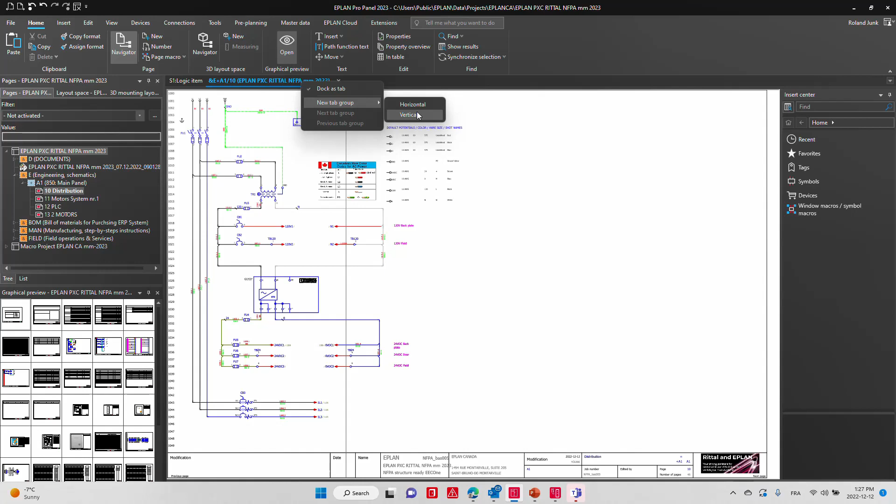You also know in EPLAN that we have the 3D. Let's put them side by side like this, right? So whatever object you have here, you actually have it here too. Now, what you do have also here is that you have the possibility to do the routing, which now evaluates the exact length of each of these wires.

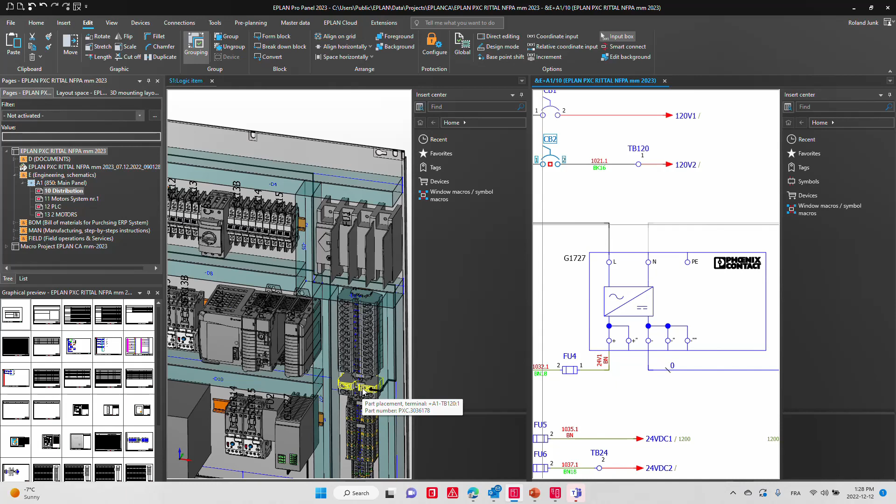So every wire that you see here, you can click on this wire and it actually has now a specific length. Why? Because I know from where exactly it goes to where it goes, right? It goes all the way across over here to this point here. And this is actually in the schematics, just this small wire here. It goes from CB2 to TB120, which is down there, that small terminal here. So we precisely identify where it goes and the length is calculated.

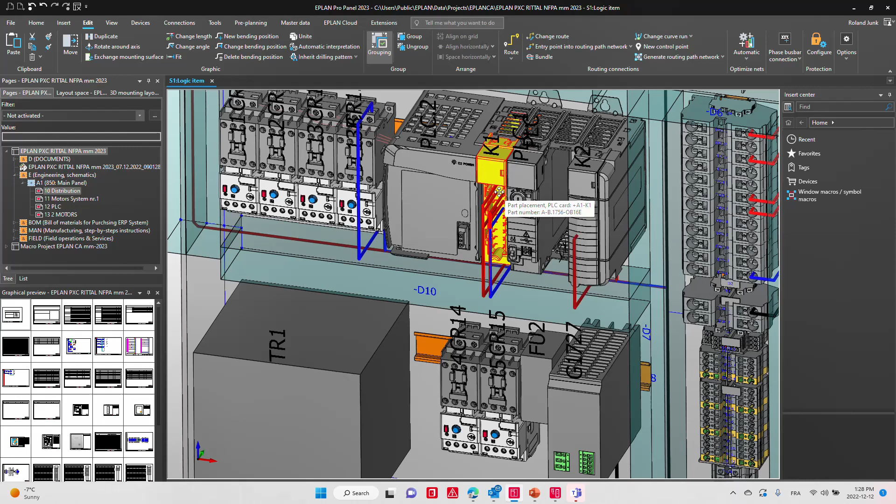Now, behind this, how does it actually work? Well, obviously, you know that most of these components, once they are placed, let's just hide this one here and you will see very quickly, this is a PLC, a typical PLC. And if I actually connect to a PLC, that PLC will hook up very precisely, as you can see here, on each of these connection points. So this is actually information that is saved at the component level once you get it from the data portal.

Now, in some cases, you have components like this one here that eventually is on the data portal, but for some reason, I did not yet download it. So the easy thing, of course, is if it is on the data portal, let's go and check it out first, and let's see what we can do at that point. So we go back to the data portal, we check it out. It most likely will be there.

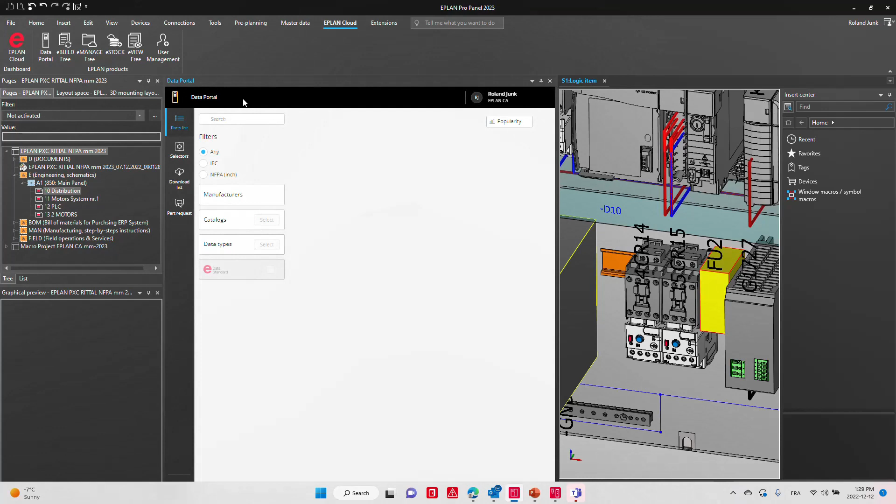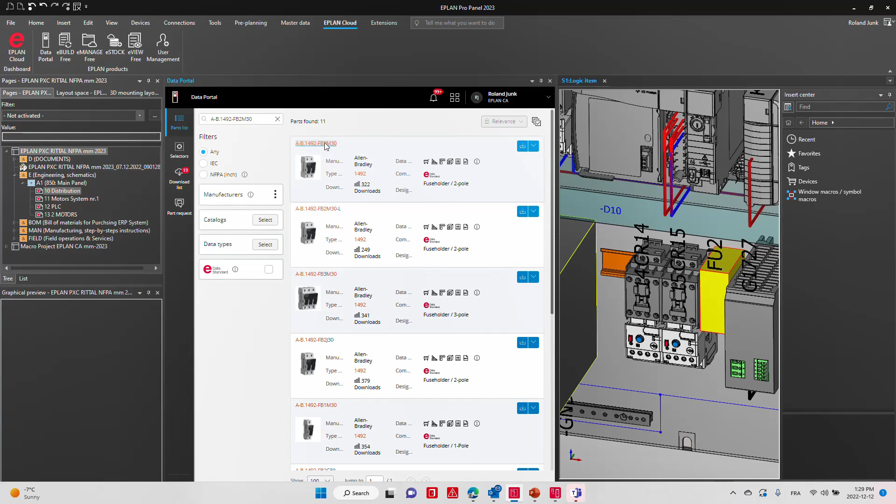I know this particular part here from Allen Bradley, I believe, is one of the companies among those 400 companies that really did put a lot of work in there. Phoenix Contact, Murr, Wieland, Festo, name it. I mean, you can see them here in the manufacturers, and these are the parts. And this is actually now the part exactly that we are looking at. And technically, if I look at this, I do have the 3D part here.

I may not have it in my system because I copied and pasted maybe the portion of the project. I may not have all these accessories, but if I import them, and I only have to import this once, now in a centralized way, I have all that parts information that, of course, will service me on the bill of material portion because I have now the exact description, the exact order number, but it also will help me when I place the component here because it's going to have not only the exact size, but the exact position depending on where exactly this component is actually set.

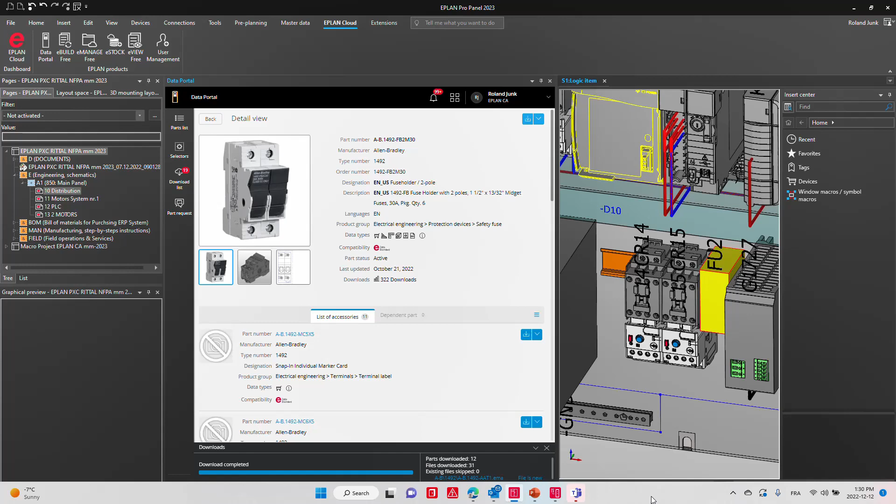So here, once it's downloaded and it's complete, let me just see, we should have access typically to an import button there. And it's going to import all that data into EPLAN. So of course, now that it is imported, the data is now available. So technically, as you know, these components here, you can simply run update parts placement. And because the part is now newly imported and the data is there, it will most likely replace it exactly with the right component.

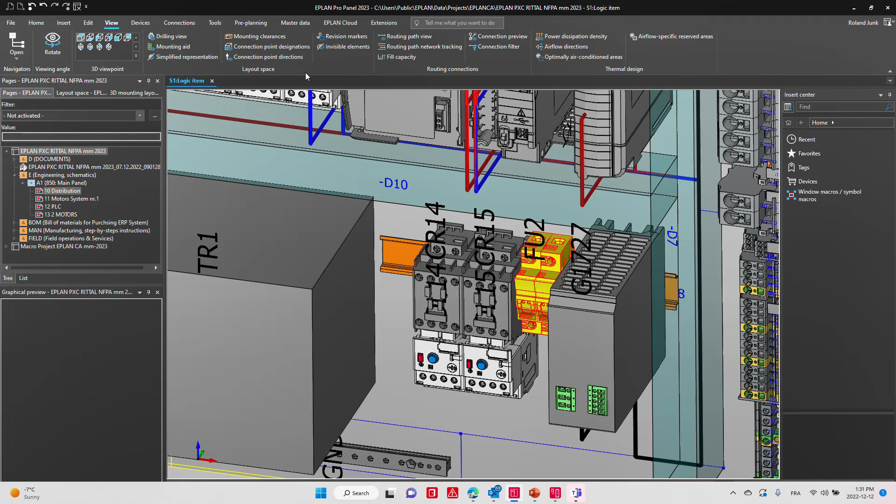And if I try now that I have this, right, and I check it out, it also has connection information to detail out where the connections go. You can actually see it here if you look at the connection point designations. They may actually have them. Now, that kind of information will actually service you when you do the routing later down the road.

Now, some people will say, yeah, well, the component that I have here, unfortunately, does not really have on the data portal the necessary data that I'm looking for, like the 3D. Okay, well, that's not a big thing because you can go on the websites very often of those components and you can find not only connection data, but you can very often find some download sections and you can find the step file, which I downloaded.

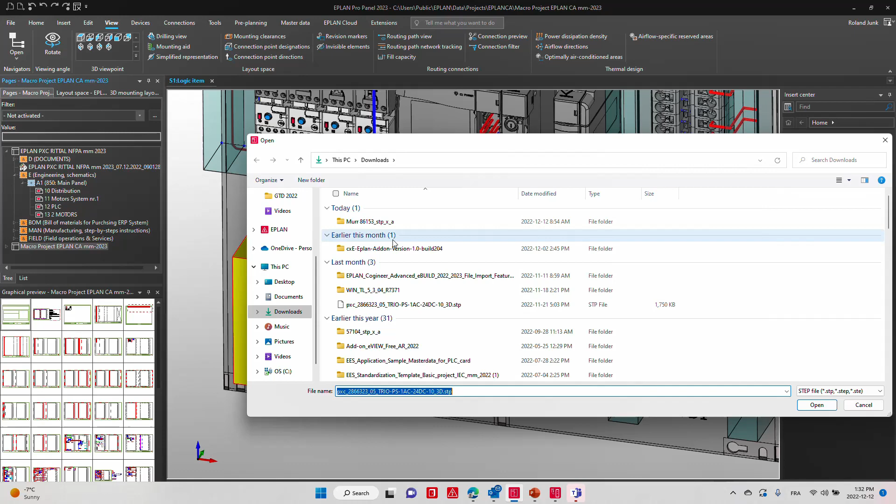So that means back in EPLAN, all I really have to do in a macro project, you just go in here, you import that particular 3D step file. So here it downloaded it under downloads. It did put it here under this component. I will just import it. Now you will see that this step file, as it comes in, there are 2 or 3 things we have to look at.

This in EPLAN, I'm not really interested in all its individual components. So I'm going to check this out and see if it's really one object. If it is one object, okay, this is exactly what I want. I can see this through the logic items, which is perfect.

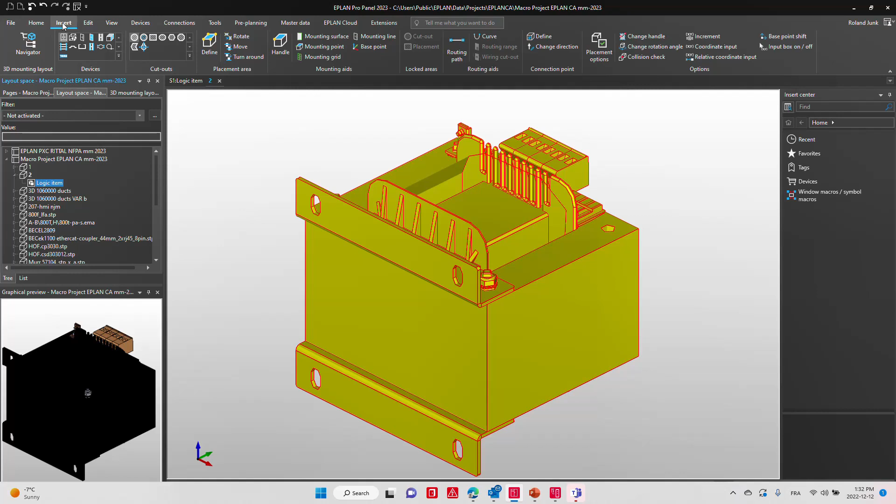Now I have to figure out, this device, of course, when it's designed, they have a different mindset. But for me, what is my placement area? And it's actually going to be this here.

When I do position it, let me just hide this task settings bar down there. Is it possible to auto hide it? Where is that? I just don't have it right now.

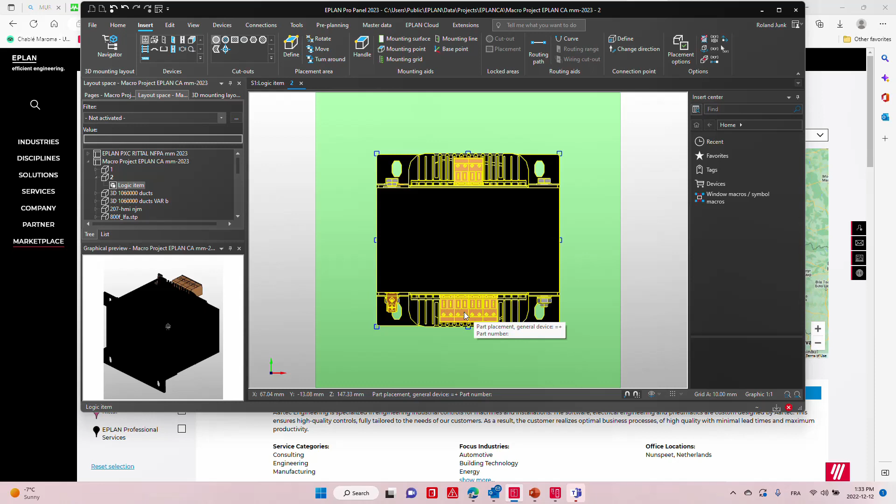So let's just double click on this. Let's have it full size because I want to, it doesn't give me this one. So here my view, let me just go there. I have a small view button that most of you know - I'm always interested to see what is my top. This is my power. This is basically this other section. And if this is the way I want to use it, this is perfect, okay?

Now in this particular case here, the second thing you want to do is precisely say, when I move this component, what is actually going to be my positioning. Let's say it's the left-hand side.

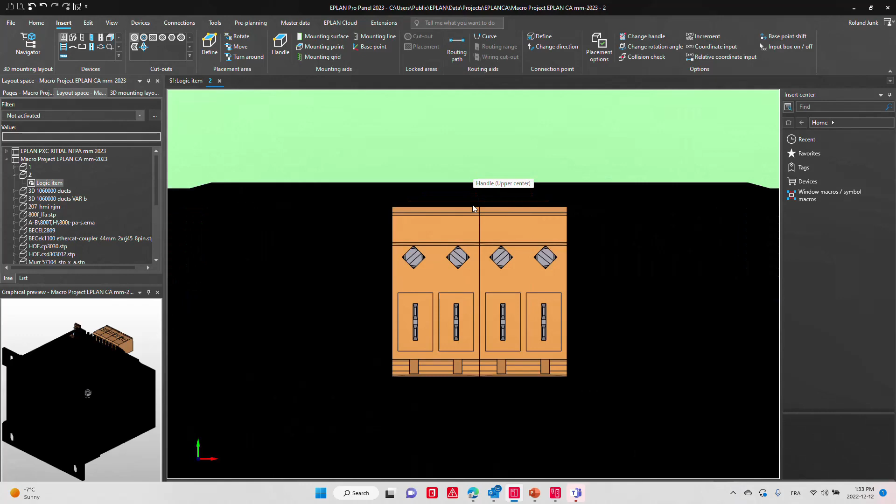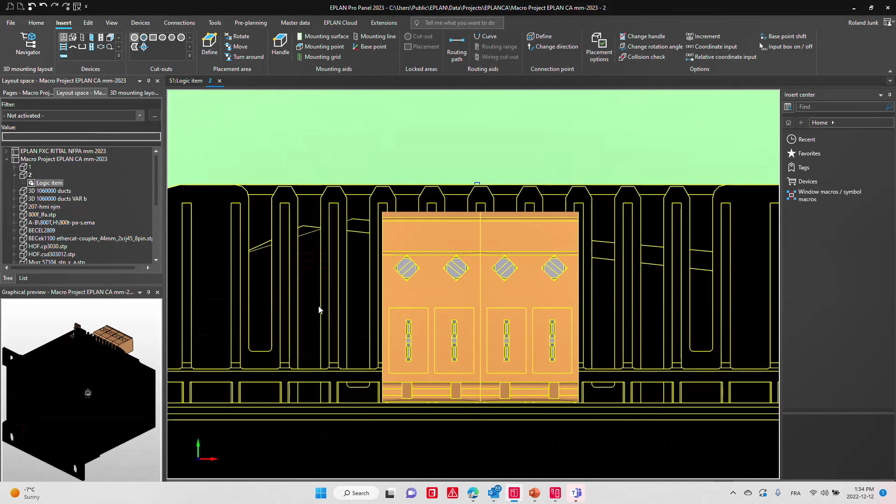So what you do then is, of course, here, let's just take this and again just rotate it slightly like this. It's going to be easier.

And then what we're going to do is place - let's say here, I'm going to try to hit this in the center to actually define where the wires actually go. So in this case here, it's going to be 9, 10, 11, and 12, which will come out here, 9, 10, 11, and 12.

So what I'm going to do is insert some connection points. I'm going to define this based on the orientation, and then I'm just going to put them here at the bottom level. That's fine enough. And this is going to be 9, okay, connection 9.

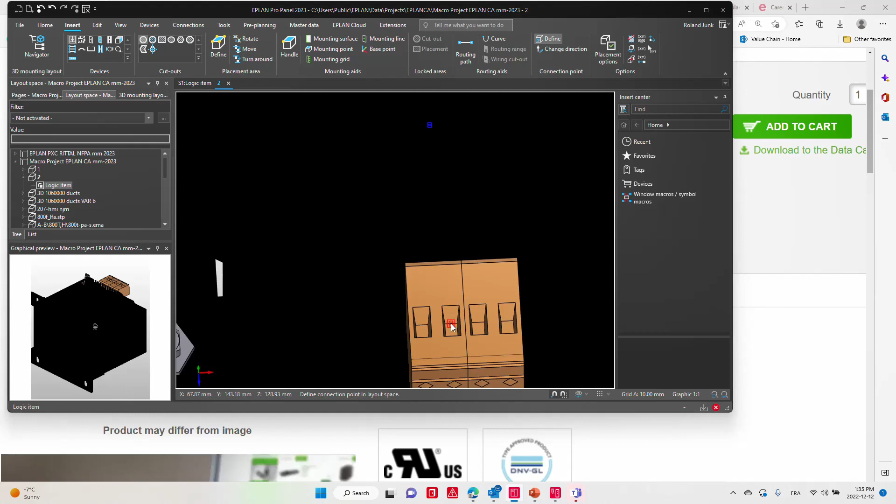I do the next thing here for the next one. It's going to be there. That's going to be the connection number 10. I said 11 and 12, 11 and 12, and 12 here, and 12.

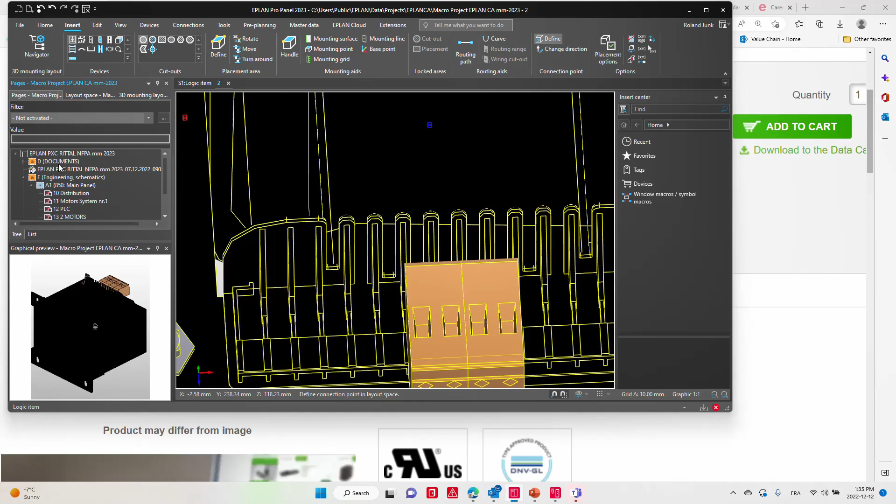There we go. Now just as a reminder very quickly, inside EPLAN, going back to our schematics here, on the schematic side, if you carefully look, I was actually using the connections 1 and 4, 9 and 11. So 1 and 4 are on the other side.

So what I'm going to do here - see that logic item here, it's not the case. So I'll switch over to my logic item again here. And I'm going to look for these ones here.

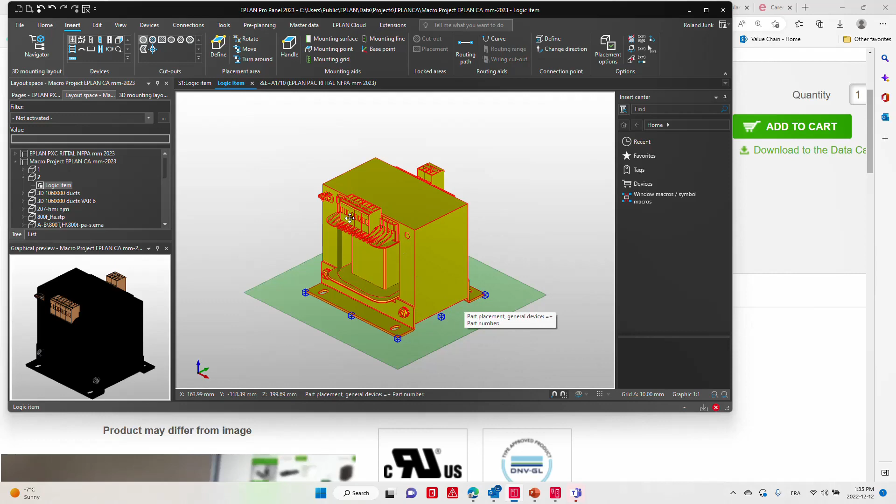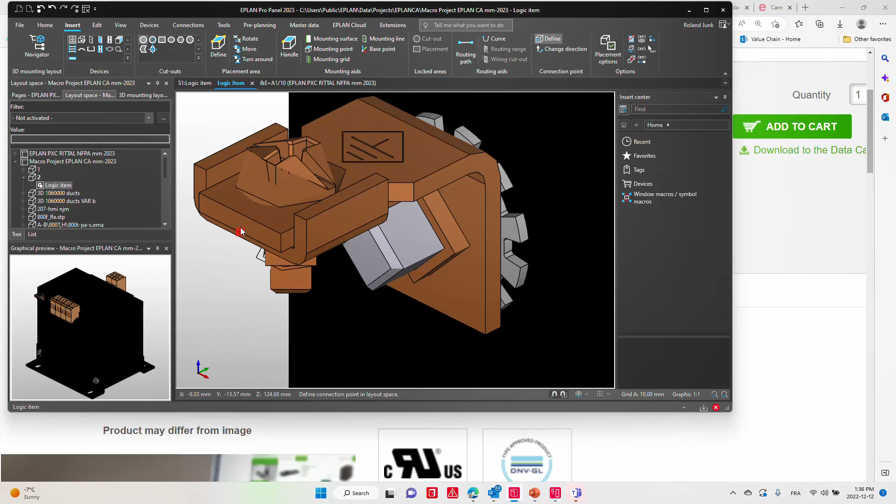So technically I can say, where's my next connection going to be? For sure, I can define my ground connection, right? The ground connection will actually go inside here. So it's going to be pointing out to the left-hand side there. And let's put it at the bottom section, maybe on the left side here. And that's going to be my ground.

Okay, that's this one. And then I'm going to focus on these ones here. Same thing, let's just rotate them so that we can actually access the correct connections, right? And here the same thing, we will be getting these connections in there.

So the first one will be, let's say, my connection number 1. I'm going to just put it on the center there. That's going to be my connection number 1. So if I carefully go and check out the drawing again, I have 1, 2, and 3, and then 4.

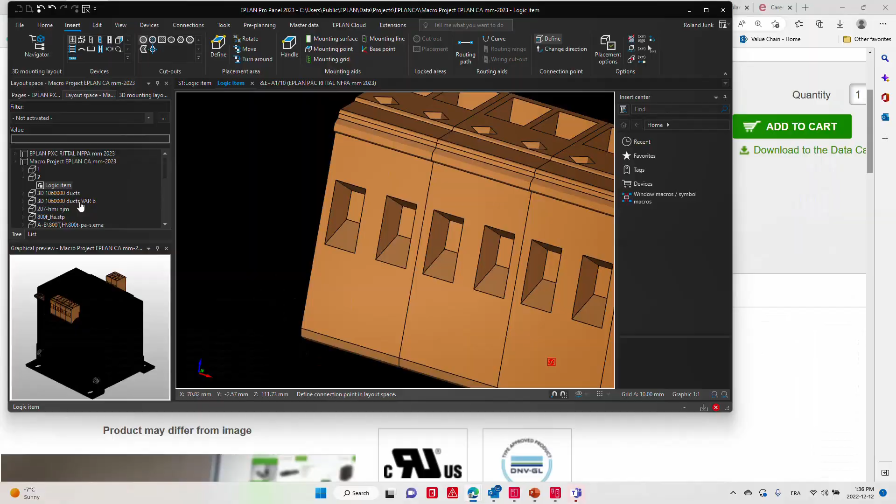Now, of course, in this particular case, I'd have to look at the exact positioning of those ones, but I would say 1, 2, 3, and 4 would be right there. So I'm just going to focus on 1 and 4. The other ones, I'm not even going to do them because I don't want to use them at this point in time.

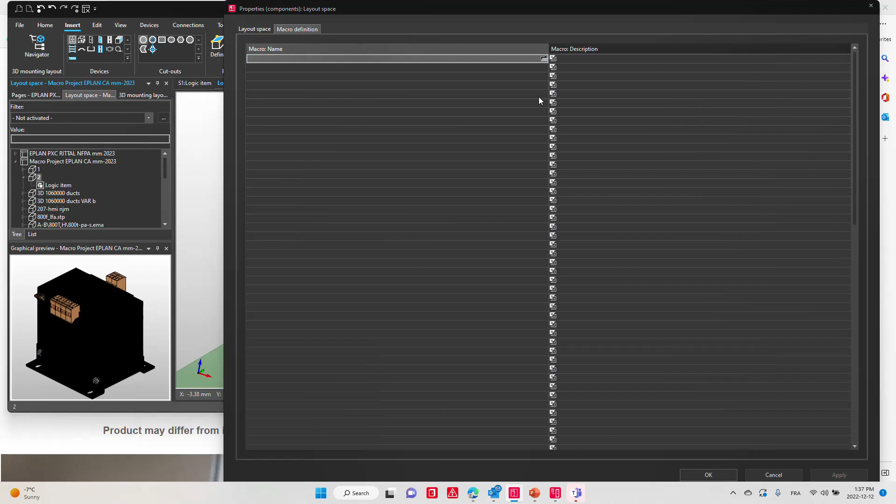I even prefer that an error actually pops up. Now, once this is done, you have your connections, you have to define on this layout what macro this will be. Since it's actually a Murr part, you will place it ideally in the Murr folder, and the name will be pretty much like that, 3D if you want. And there we go, it's an imported step file, and it's done.

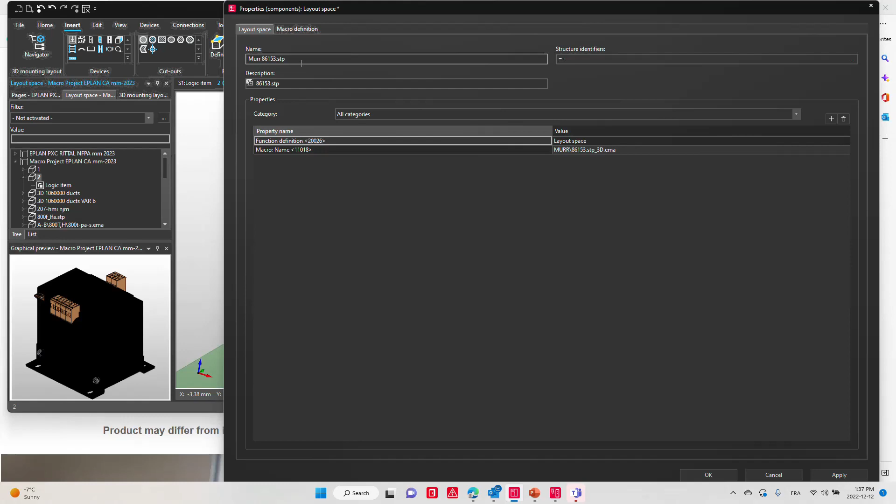Don't forget, once you have this, it's always a good thing to name your layout space, so that you can recognize what is below it, because 'imported as layout number 2' isn't really helpful, okay? So once this is done, now we have the Murr part, which is somewhere down here, Murr.

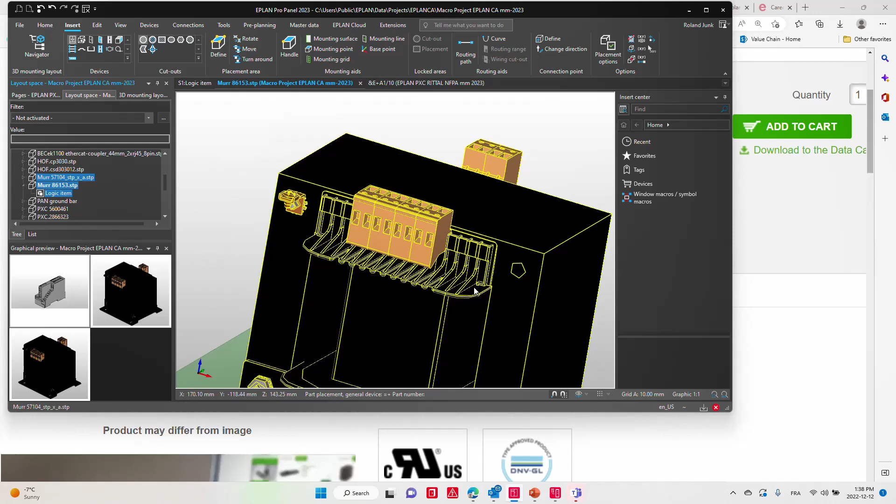I have a few, you can see here. I can pick more than one if I want to, and I can simply now run the generate macros. This will generate the macros so that I can populate my parts database, so that instead of just knowing the size of the component, I will now know how it looks.

So technically, if I go back to this component here, remember it is all based on a part number. That particular part number has a number of information. One of these, macro related, is here the graphical macro. As you can see, it's actually empty.

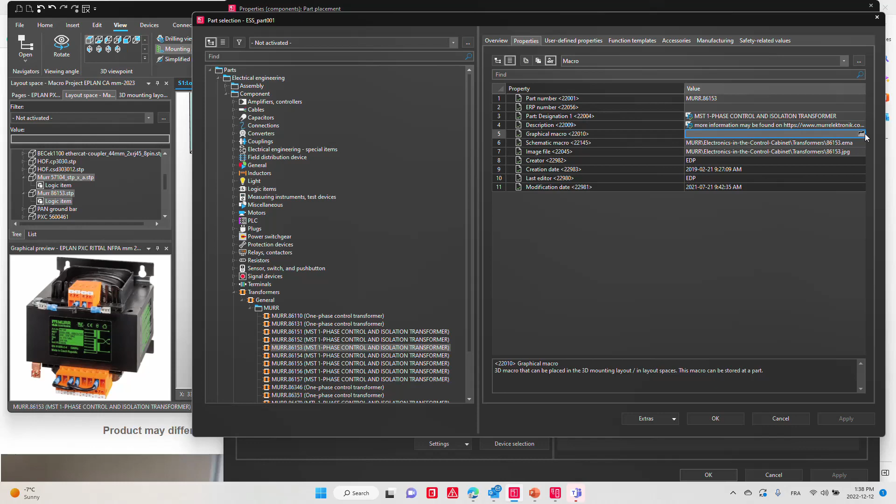I'm just going to assign that macro that I just created. Easy to find because I created them in subfolders for each manufacturer, and I can recognize the file I'm interested in. This is the one. I assign it, click OK, it saves it, and boom, it's there.

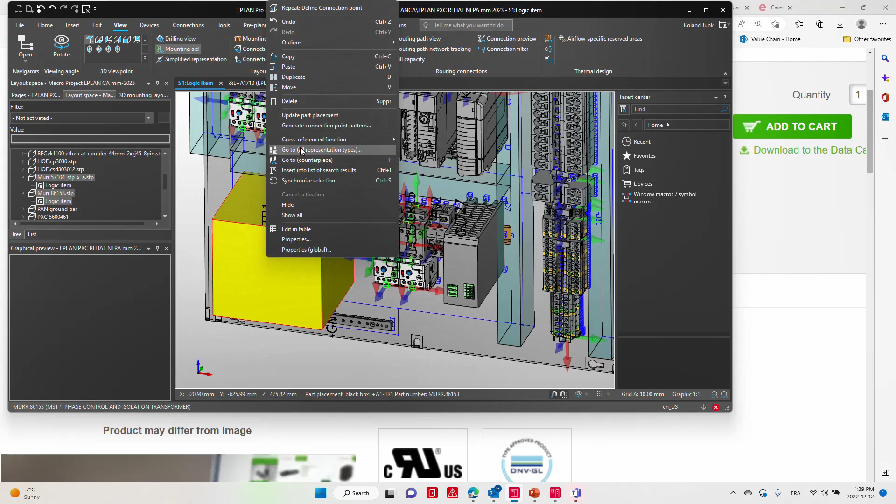Now, can I actually just place it by updating the part placement? Most likely yes, because the way it's positioned with the handle on the left-hand side, this pretty much looks the same. So I have exactly what I need here.

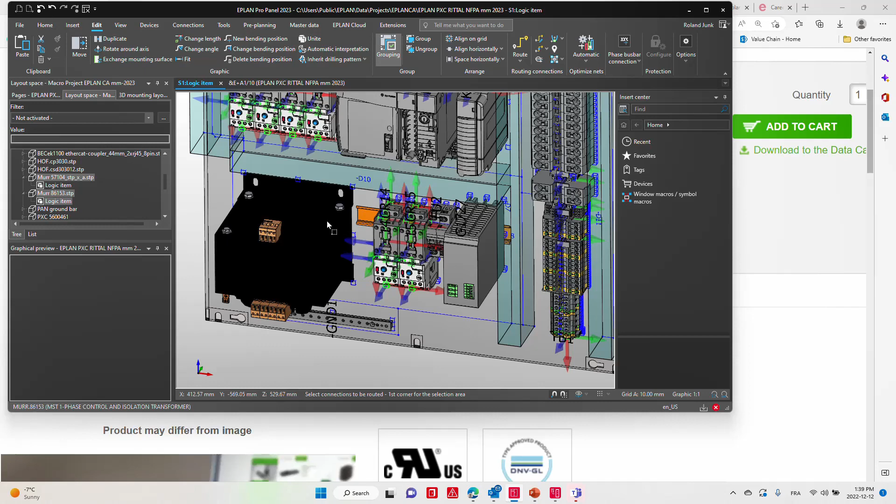And there you go. And if I do the routing this time, it's actually going to be sensitive to look at the wires to be connected exactly where I need them. So if I take these and just route them, you will see this transformer will connect exactly where I tell it to connect.

Now, I think I did the whole routing of the whole panel because I accidentally did a left selection. Similar to other CAD packages, it actually selects everything.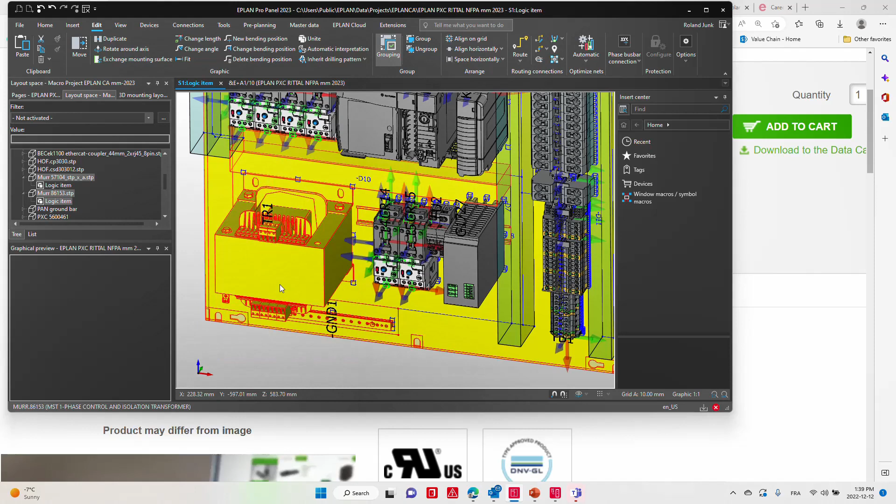So you can see here, we are starting the wire exactly where I specified it, right? This comes out to be exactly on the dot, on the spot where we decided the wiring is done. So it's the same thing for most of these other components, and you can see that all the wiring is done.

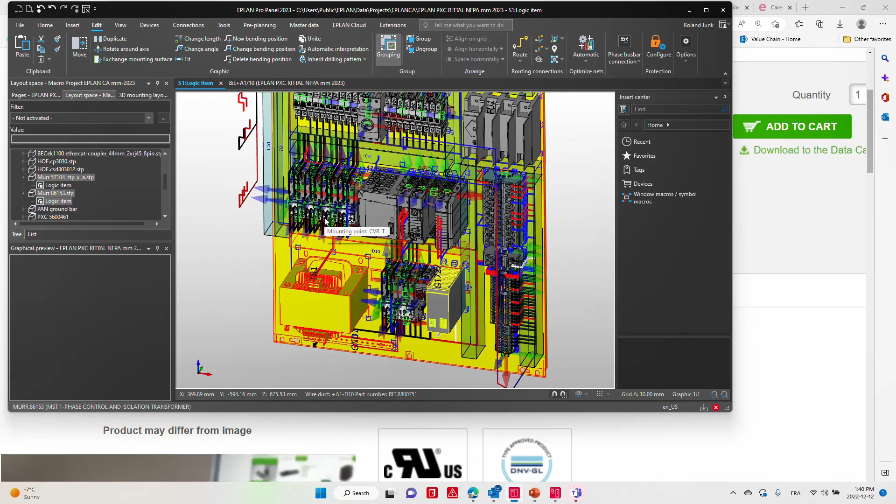Sometimes even the wiring is done to the side of the panel, because in this one here I had to condense the whole thing a little bit, and I actually placed some components here on the left-hand side.

So it's fairly detailed. And now, with this length calculation, not only can you produce the wires a lot faster, but you can now export that data here to some wiring equipment. So smart wiring is one thing you can export it to.

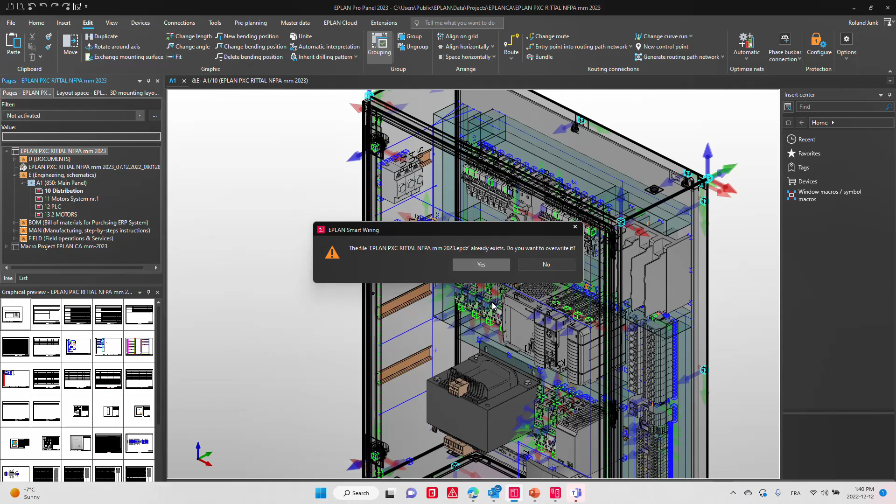So this is the EPLAN PXC RITTAL NFPA mm 2023. Just going to overwrite that file. And I will actually be able to help my electricians with a very, very detailed view.

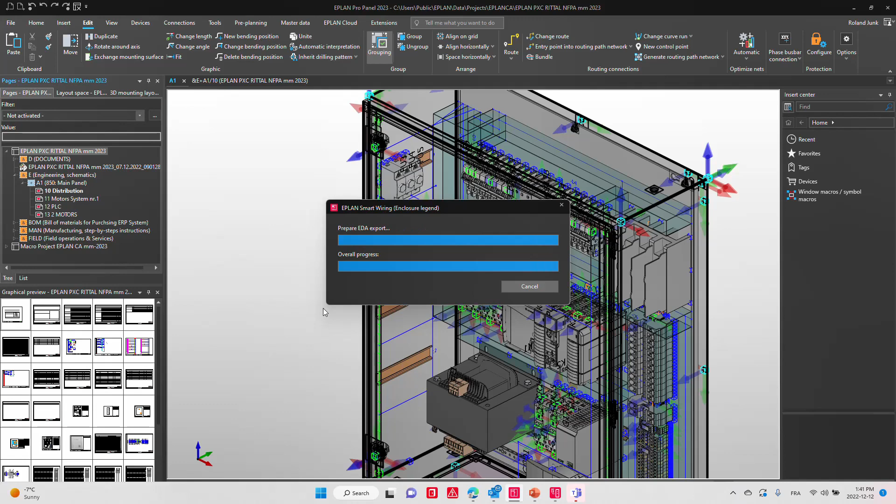Now this is only the start, because from this information we have here, we could also feed a WT terminal, which is a wire terminal from RITTAL, where they will actually print the wires. This is how I call it, because they will cut, crimp, and label the wires and hang it over a certain hanger.

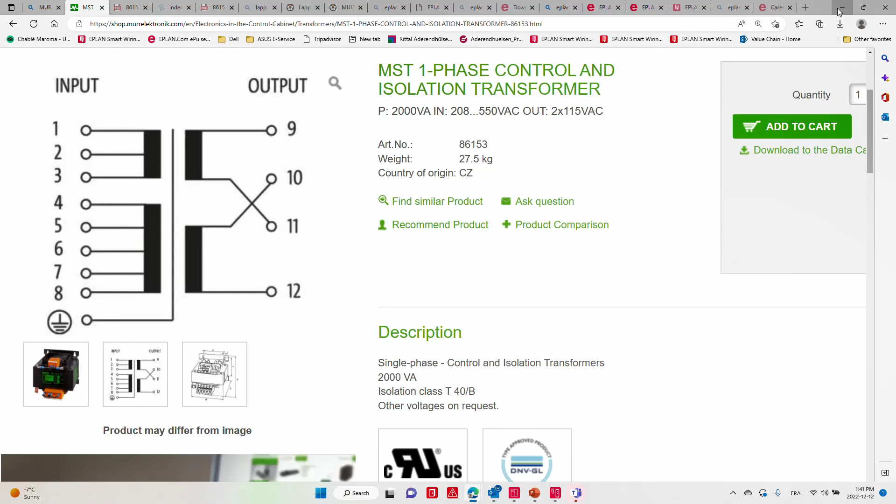That pretty much enables the user to switch over to a tablet, and then he could be in smart wiring. So let me show you how that looks when I'm in EPLAN under smart wiring. Technically all I do is create a new page here, hook up to my smart wiring, which is the server I just went to.

And once you are here, you name yourself electrician number 1, whatever, usually it's a name, right? This is actually for the electrician down on the shop floor, and he would either continue somebody else's job, or he would open this new project that I just created here.

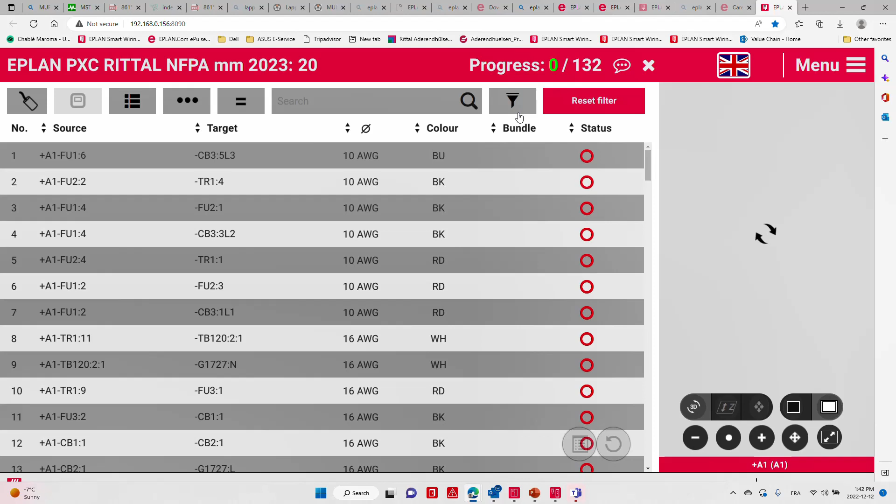And that would be my first instance to produce these wires. Now I have 0 wires done. Maybe I want to work on specific wires first. Let's say I have crimps for 10 American wire gauge.

So I want to work first on the 10 American wire gauge. You can see they are all identified here, and I can just start by looking at the source, target, the from-to. I can even move from one to another, and it actually tells me exactly how the wiring is done. So technically, you go from here, you move over, boop, boop, boop, boop, you go there.

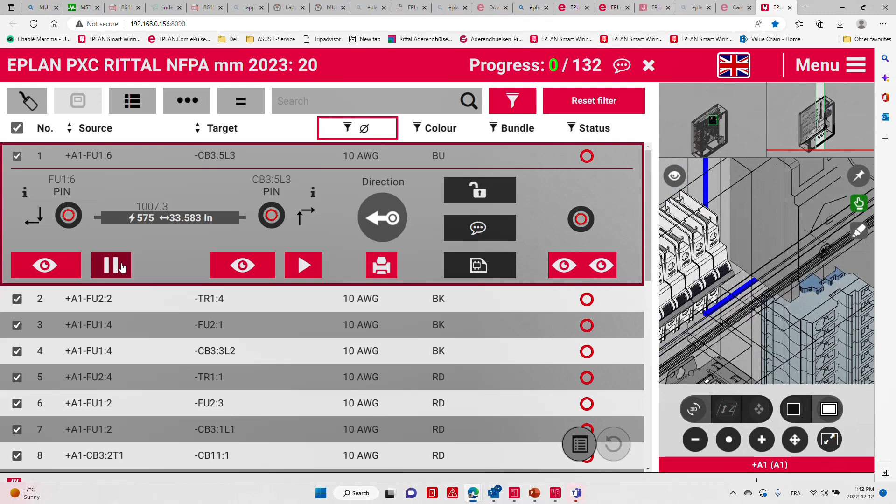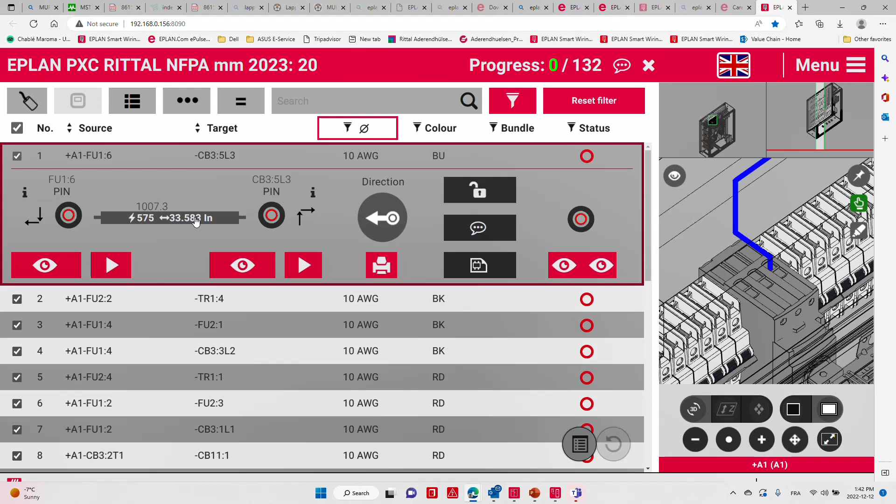Now, the intention is to pre-cut the wires as quickly as possible or by the machine. So either you have a cutter from Phoenix Contact or from RITTAL, or you can also have the crimping done automatically. These are crimping machines that actually exist from different companies. Or you have the WT that produced this wire, and it will give you, on top of that, a hanger kind of thing where you can just pick up that wire.

And then just install it. Source, target is installed, status is changed, we switch over to the next wire. So always the same thing here.

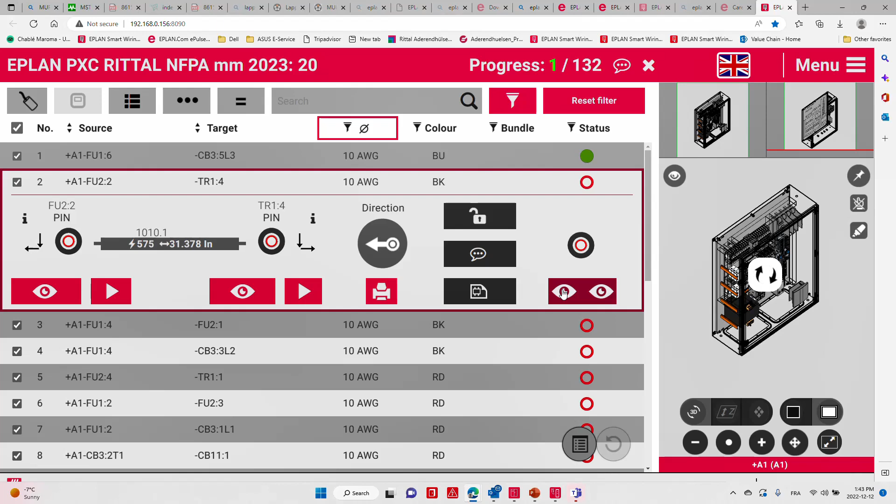Plus, another thing that is quite interesting is if you look at this wire and have any kind of questions about it, you can look and focus on the schematics where it actually comes from, because it will tell you these are the two components we just looked at, and this is the wire where it actually comes from.

And if you have any kind of questions, you can always mark up that wire and lock it up and say, no, nobody touches this, and you can send a message, or you can just continue and install it. And as you're installing the wires, preparing the wires eventually, this actually runs in the background and keeps track of these.

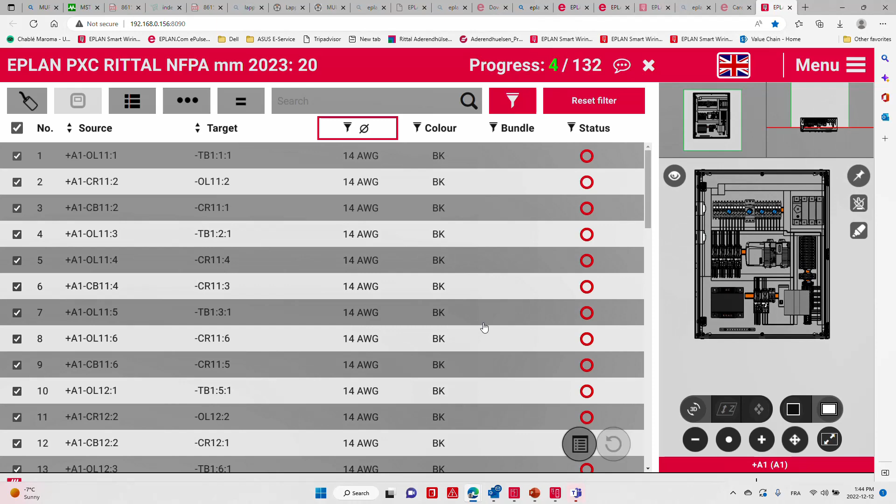Now, if for any given reason the crimps run out and you have to go get some, but you work on an accord or a time schedule, maybe you'll switch very quickly to your 14 American gauge. And then you just continue. You say, okay, let's go ahead, let's do this one here.

Cut it to exactly 55 inches. It happens to be a black American wire gauge 14. And then I'm just going to do this one. This one I have to torque. You can see max 2.5 Newton meter.

So be careful here. When you actually install it, this one here is probably just a crimp-in and you just install it. You can see here we have different Newton information, torque information for every one of these wires. So here it's of course a wire that gets installed onto a device that requires a screwdriver, not a snip-in, and they tell you the torque ratings. So it's really quite interesting what this tool does.

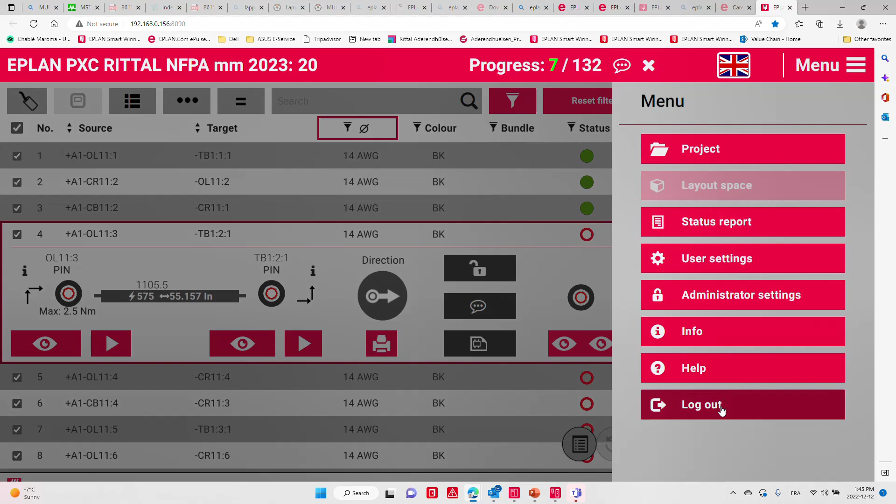Now, even though, let's say it rings the bell, it's 4 o'clock in the afternoon, you stop. So you basically just go out there and log out. And you say, okay, done, okay? And you're finished. So basically you're doing even quicker than this, you just leave it. Now, what happens the next morning, somebody comes in, or even in the next shift, he starts, same thing.

So let's say I'm here starting my EPLAN smart wiring. I say, okay, this is Roland Junk, and I log in. Let's continue the work my colleague electrician just started. Here, EPLAN, Phoenix Contact, that's the name of the project, could be a drawing number, whatever. And I can say I'm going to open the very last instance, which is the instance 20 you just saw earlier. It goes in there, you can see we have 7 wires out of 132.

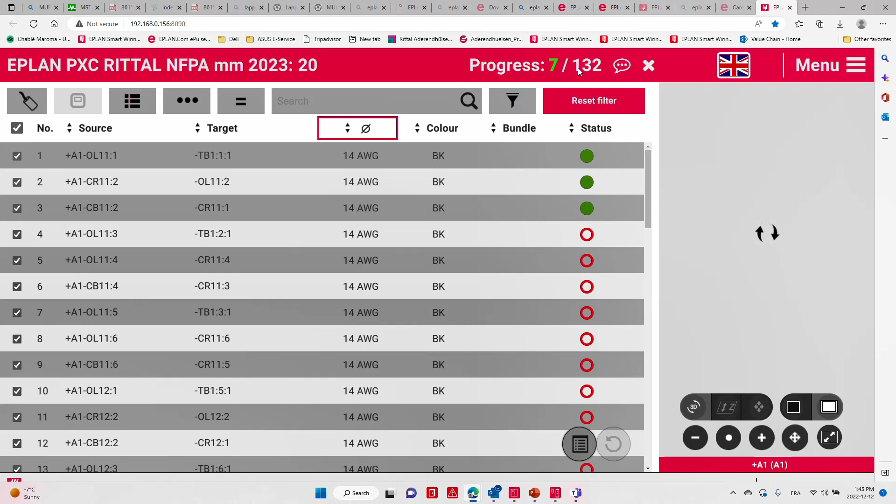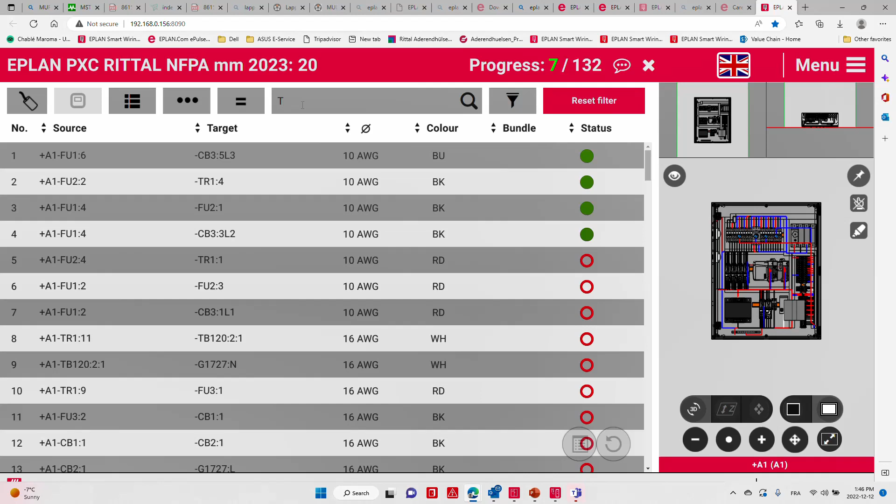Now, I may come in here and say, okay, I first want to work on something specific, so I can actually zoom in and say, you know, I really want to look at this portion here, which is my transformer. So let's go back here and look specifically for the transformer. If you carefully remember from earlier, it was TR something. So you can go TR search, and then you get all the wires that are actually on the transformer.

Whether it's that number, oh, it's already done, see, I don't have to touch it. Transformer pin number 1 is not done yet. It's a 10 red gauge. So let's install it.

Boom, boom. And then let's go to the next one. That's basically the TR1, which goes to the TB120. So I'm feeding the 120 volt. You can see this is the neutral here actually, right? And it actually works out. It happens to be the right pin. This is the 120 that comes out of pin number 9.

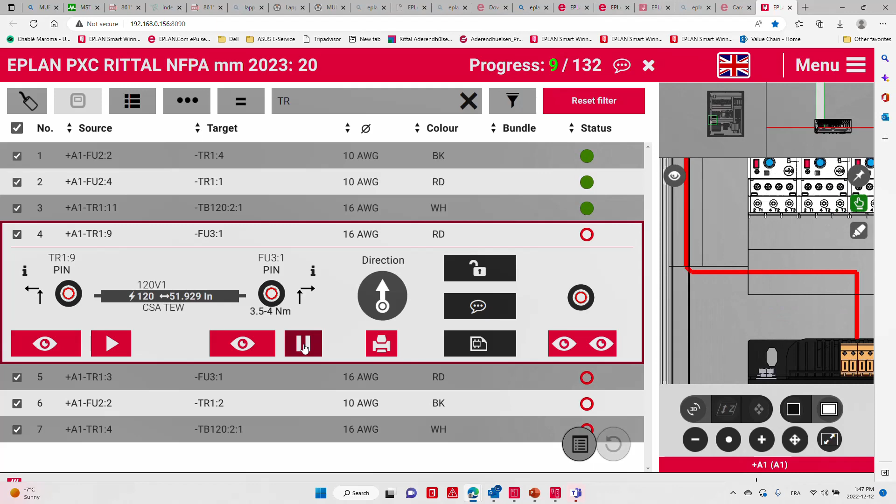And I will actually wire it up this time. Where's that component here? It's on the wall. Okay, so basically I'm running off the wall on the side, going down here and moving over here. So if I carefully look at this, I can see I have actually 2 different tracks, 2 different ducts. One for the high voltage or 120 and one for the 24 VDC.

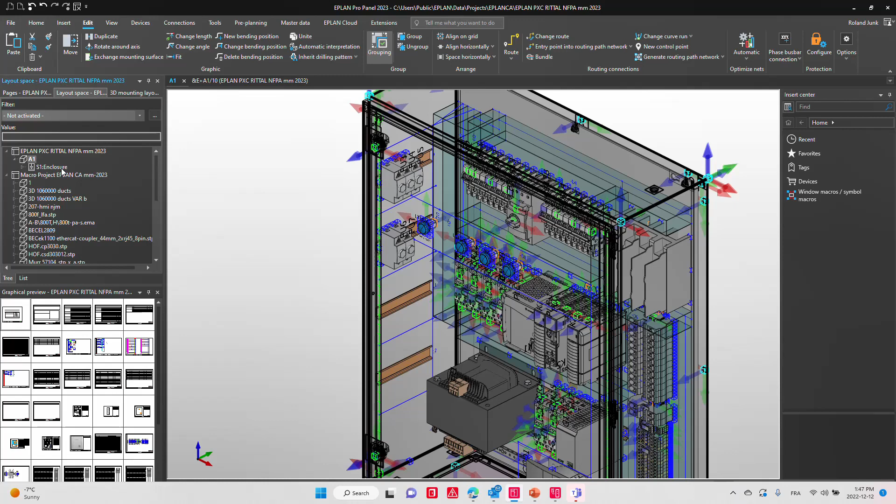All this is something that you can pre-arrange inside EPLAN, because technically in EPLAN, when you drill it down to, let's say, your panel and you check it out, I even went and decided that, see here, I have two different ducts, one a little bit larger, the D1, and the other one is D1.1. This one here will only handle the 24 volt stuff. The other one will handle the 120 volt, or basically not have any filters. And that makes a whole difference, because you will have the wire that will actually choose the right wire duct to where you go.

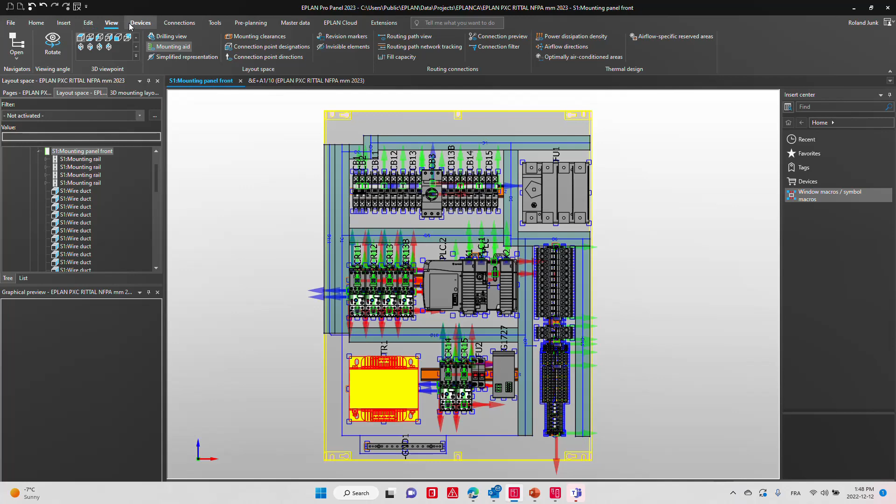Now, another thing that is interesting, because I am here in a digital twin, I can now pretty much decide to actually optimize this whole thing. Because let's say we go in here and say we want to stretch this out a little bit. This will actually change my wire length. And if I do have the wire length changed, that will, of course, produce the wires in a different length. All these kind of details, if you wouldn't have here the digital twin, that would be impossible.

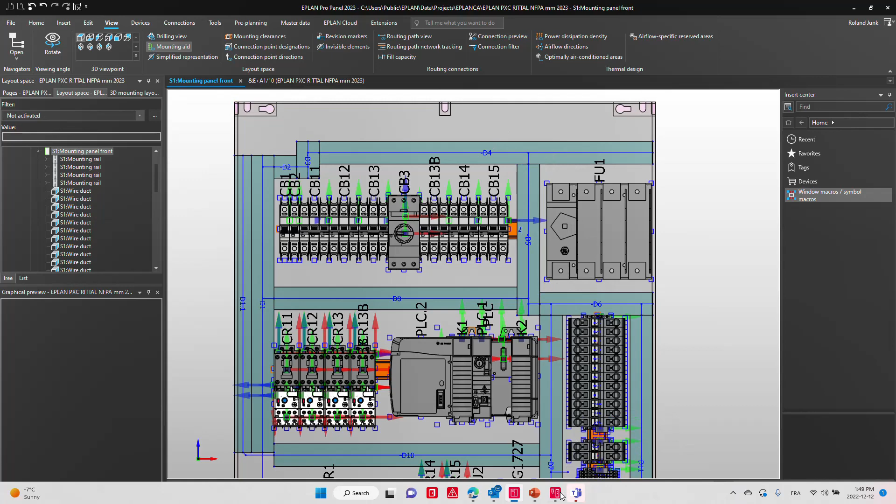Another thing that is interesting too, any kind of change, the wire length or even the source and target, can result in some issues because I have installed maybe that particular wire. So if I do change something somewhere, EPLAN is capable of analyzing these changes, very complex topic, and actually will tell the electrician, please remove these wires and reproduce these other wires. And remember, the interesting thing is that because I now have the wire length, I can actually use the automation that was planned in by Phoenix Contact or by RITTAL on the wiring side.

Now here, I'll invite you to actually go and contact your RITTAL or Phoenix Contact specialist. Here, RITTAL has something interesting, the RITTAL WT terminal. On a very small space here, we can actually place and position and create all the wires automatically and have them pre-printed. But this is only possible once you go to that level.

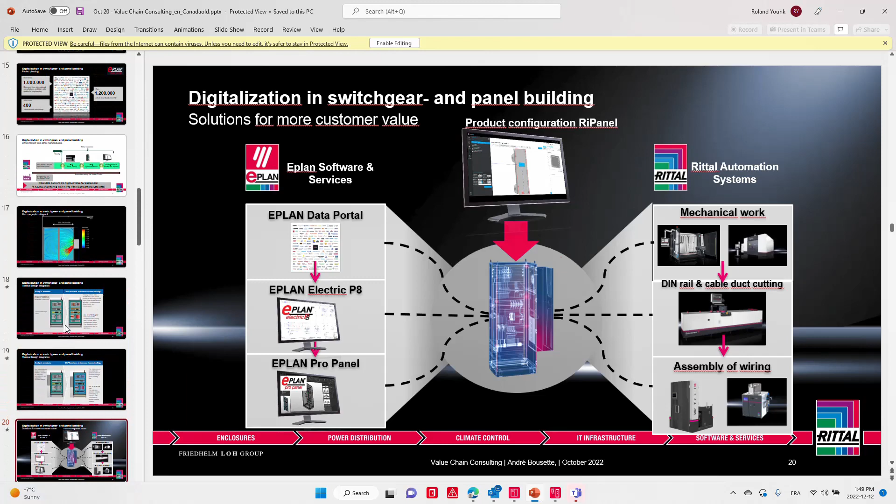And of course, if I go back to my initial thing where I said, well, 45% or 49% of the time is actually spent on the wiring, well, this I can easily cut in half and even more, depending on how I make use of these machines. Now imagine cutting half or more of that 49%. That basically means you will be producing that many more projects in a year, because I'm cutting off 1/4 to 1/3 of the time. Imagine, this is huge. This is huge. This is the biggest secret of all.

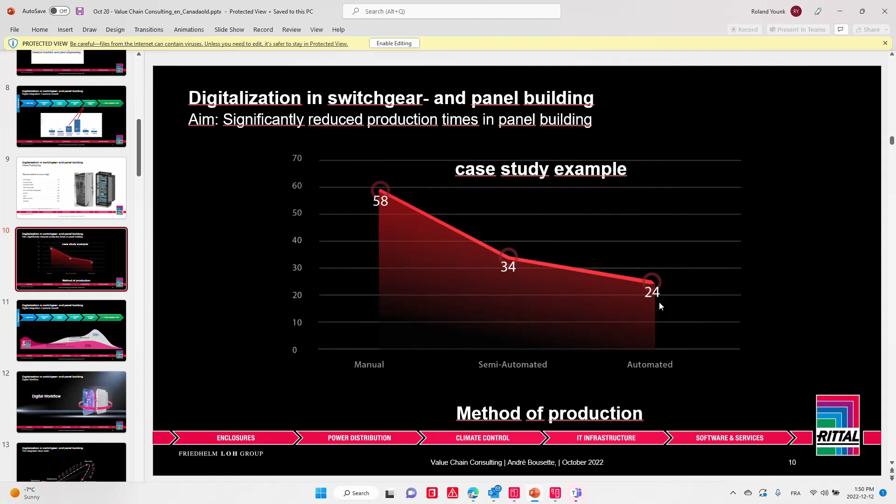If you know that this is where you spend most of the time, work on that to be efficient, and you'll see this is where you cut down. On average, we had cases where we cut something that took 58 hours down to 34 hours, or even to 24, depending on what level of automation you get. And this is exactly what we are qualifying when we look at the EPLAN certification level. When we do the certification inside EPLAN, we say, okay, you can save some time here if you work your way up to that efficiency.

This is what these level 3 integrators can offer you, not only a perfect bill of material to start with, a perfect digital twin for NC drilling, but also now for the routing. So routing, remember, means they are manufacturing machines faster and more accurately, with fewer errors. If they do the same machine over and over, the two machines will most likely look alike from a wiring perspective. This is the top efficiency level when you combine all these together.